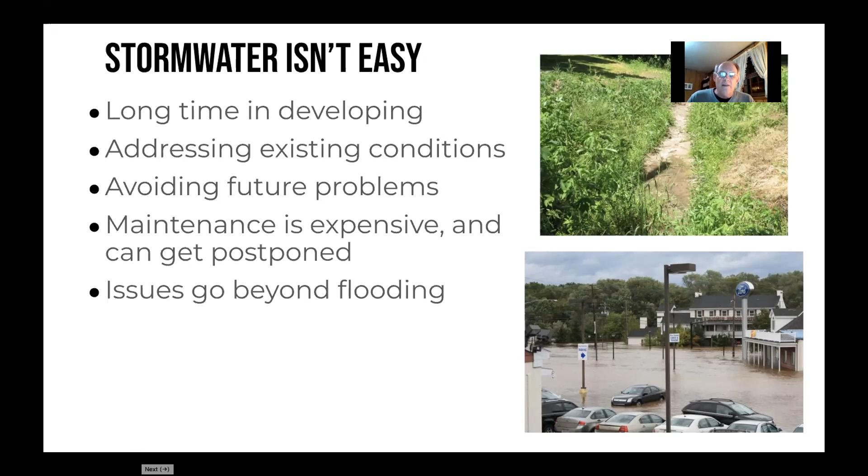And the issues go beyond flooding. The bottom picture there that you see, it's an unfortunate situation. Cars are in the floodwaters, buildings are in the floodwaters, but it goes beyond flooding and gets to the very hydrologic cycle, that water cycle that we all learned about in high school. The top picture is a stream. It's a small headwater stream, and there should be water in it, but there isn't, because we're disrupting the water cycle with all of our impervious surface and the disruption to the land. And so we're creating a problem that's even bigger than just stormwater. Next slide, please.

So what is the problem? And let's get down to a basic question. What is stormwater? So we're all on the same page. We're talking about rainwater that runs off the land during and just after a storm. And can it be a nuisance? Yes. When flooding occurs, when our basement floods or the backyard is wet and mushy, yes, it can be a nuisance.

Can it be a threat? Yes. When roads flood and emergency vehicles can't get through, or people can't get home from their jobs or get to where they're going, it can be a threat. And sometimes people drive through flooded areas and disasters happen. So we can have some real problems relating to stormwater. But it's also important to realize it's a resource. This is the water that recharges groundwater, that keeps our forests alive, that ultimately becomes our drinking water.

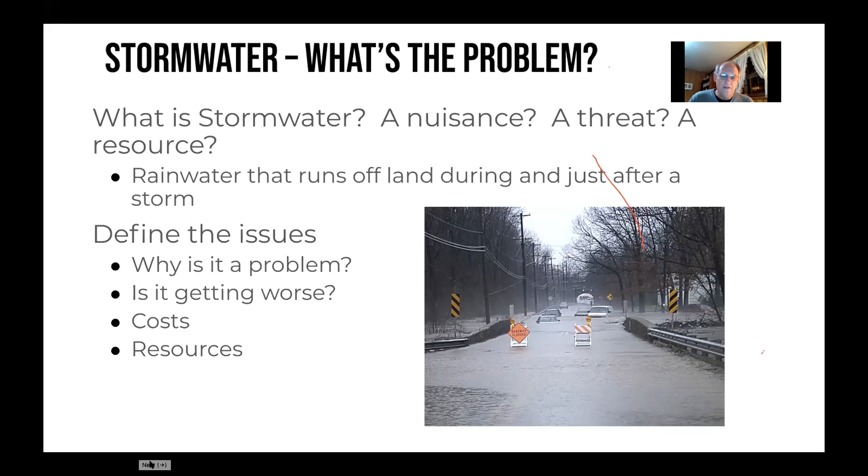So it's a resource. So I want to talk a little bit about why stormwater can be a problem, and is the problem getting worse, and the costs involved. And on my last slide, I just have a few little resources for you to consider once we're done with the presentations. So next slide, please.

Right, these 4 pictures show a transition from the forest. I'm not sure where that red line came from, but this transition from the forest to an urbanized environment. And keep your eye on the horizontal arrow. That's signifying runoff. When rain falls on the land, it can go in 4 different directions. It can evaporate back into the atmosphere or be transpired through leaves of plants back into the atmosphere. It can soak into the shallow soil and be held in the spaces between the soil, or it can soak deeply into the ground where it recharges groundwater, or it can become runoff.

And in the forested situation you see in the upper left, about 10% of what falls on the land can become runoff. As we move from that forested situation to a rural development, which is really low density, even so, runoff can double. We can have 20% of the rainfall running off the land from the hard surfaces that are represented by rooftops and driveways and roadways and sidewalks and so on.

Moving down to the suburban style development that we see so much of in Montgomery County, now runoff is about 30% of the rainfall. And this, again, is coming from all of the hard surfaces, even the lawns that developers put in. They're compacted, they're smooth. So everybody wants a nice looking lawn in their front yard, but those lawns don't infiltrate a lot of stormwater, and it all runs off and becomes about 30% of the rainfall as runoff.

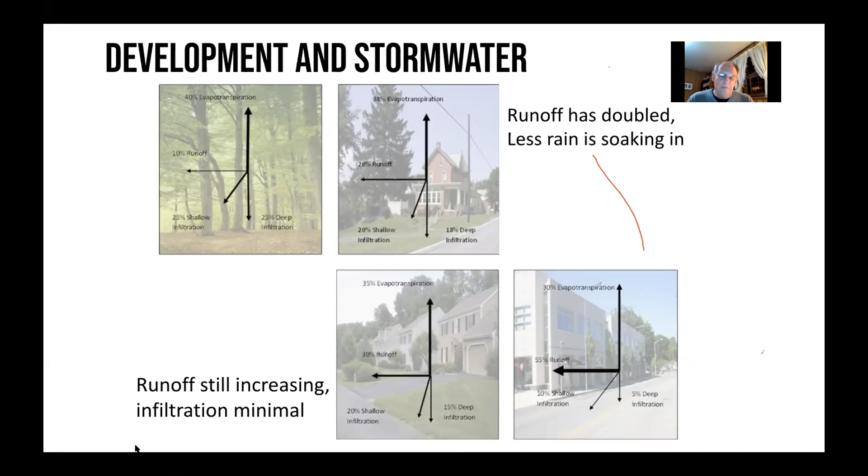Next slide, please. I have an illustration. If you're not good with arrows, this should help. Keep your eye on the little red dot. This is a portion of, I think it's Upper Dublin Township outside of Ambler Borough. This picture was taken around 1969, 1970s.

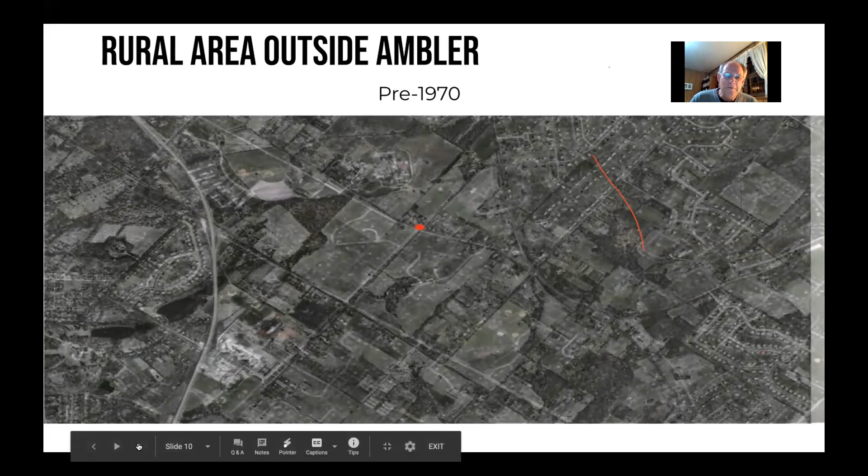Next slide, please. And watch, it'll turn to, I hope, our developed landscape that we see, and all of those roadways that appeared, all of those parking lots and rooftops and so on that appeared. They all generate stormwater. They all prevent rainwater from soaking into the ground, and they become runoff.

Next slide, please. So the result is periodic flooding. It can be nuisance flooding, like I mentioned, with roads being closed, or it can be catastrophic. We've had some tragic events in Montgomery County where people have been swept off of roadways or trapped in buildings, and they've died from floodwaters. And so flooding is nothing to be taken lightly. It's a very serious situation.

And let me just take a moment and ask you, please, never to drive into a flooded roadway, because disaster can happen. So we have loss of services, loss of property. People's yards get washed away, buildings get damaged, and the threat of loss of life. Even our emergency response personnel, when somebody gets stranded, you see that lower picture on the right, they're there to help, but they're putting their lives on the line, and it's dangerous.

We also see environmental degradation. All of the material on the surface of the land, the automotive fluids that drip from the bottom of people's cars, sediment, road salt, that all gets washed into streams, and that causes environmental degradation. Or even just what we call the flashiness of a stream, where the stream quickly rises during a storm and then decreases down to that trickle you see in the middle of that creek there.

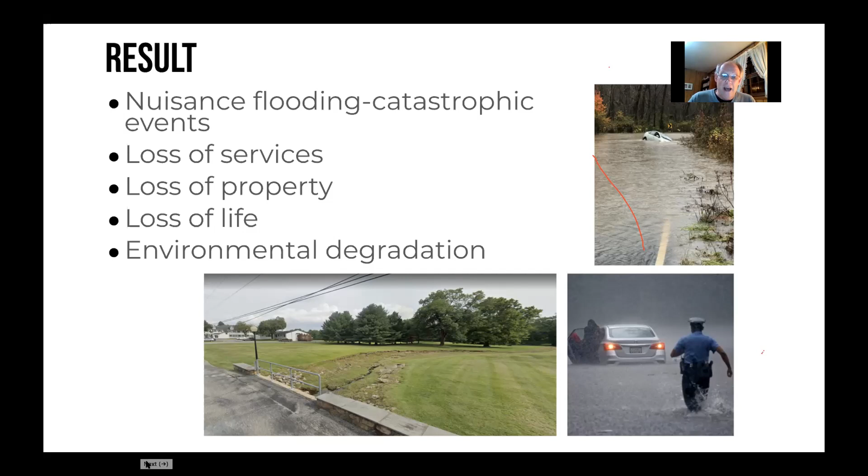That's not a healthy environment for anything. The fish, if there's anything that's living in there, they're stressed. There's no trees to shade the water. There's no vegetation on the banks to hold the banks in place. It's just a degraded environment. Next slide, please.

Okay, so the question is, is it getting worse? I hear people all the time talk to me at work and they say, it just seems like we're getting worse rainfall events. And they're right. This map came out a few years ago. It shows from 1958 to present, the increase in heavy rainfall events.

And that's my lifetime. I was born in 1959. So this is something that I've experienced, everyone's experienced. Look at Pennsylvania, 71% increase in heavy rainfall events during that time period. So it is getting worse, and we are seeing more flooding. It's not just your imagination. Next slide, please.

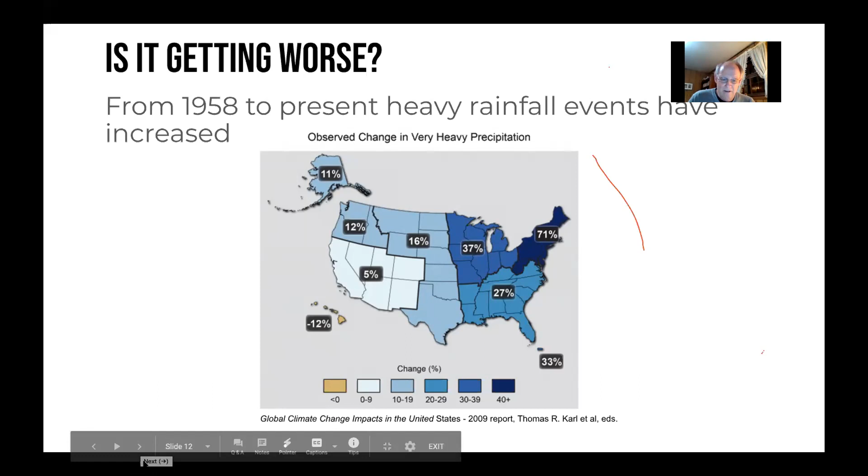And we all see these events. If you've got a smartphone and you're on some notification device, when a storm comes, your phone's going off every 5 minutes telling you about a flash flood watch or a flash flood warning. We see rainfall amounts on forecasts. Then after the storms, the media shows pictures of destruction, roads being washed away, culverts being undermined.

PEMA, the Pennsylvania Emergency Management Agency, did a study a couple years ago and found that $125 million in damage was caused to public infrastructure by severe storms. That's not private property, that's public infrastructure. And nearly half of it was not covered by federal disaster aid. So who covered that cost?

Well, the local governments, local agencies, but ultimately you and I covered a fair amount of that with our tax money. And that's money that literally is down the drain. I mean, we could avoid that cost with some good solid planning. Next slide, please.

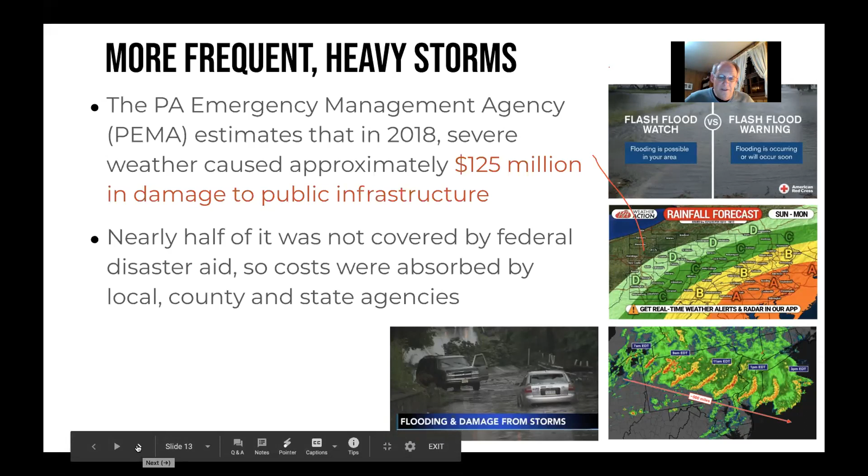More on the cost of stormwater. It's not just the facilities. They have to be inspected. They have to be maintained. Storm drains need maintenance. If they clog up, that'll result in flooding. New facilities need to be installed to correct problems as they come up.

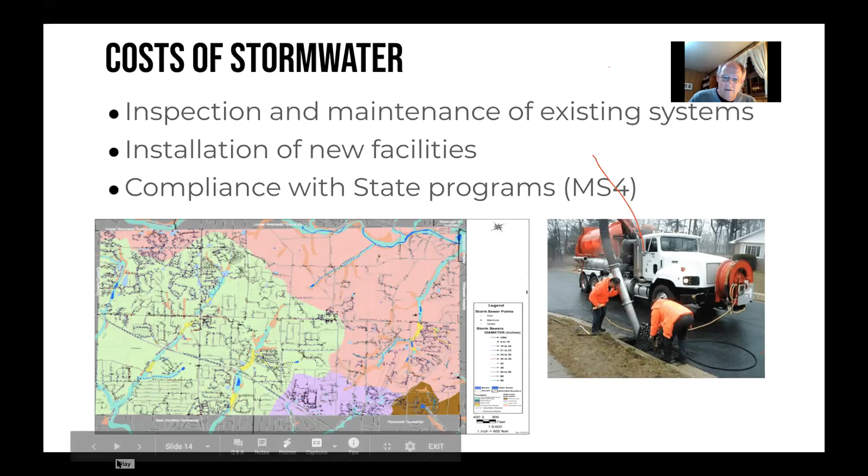And when I talk about costs, people always say, well, what's a rule of thumb? And I found there's no rule of thumb. You can't say, well, it costs so many dollars per gallon of stormwater treated or whatever, because everything is different. The situation is different. The physical characteristics are different, and it's very difficult. But I have some cost figures here to give you a general idea of what we're looking at.

The EPA has looked at their program, the MS4 program, and they found that developing the program across the country cost municipalities over $600 million nationally. That's an average of $140,000 per municipality. Now, of course, a small borough, like Green Lane Borough or Red Hill, they didn't spend $140,000, but places like Abington Township, Lower Merion Township, they probably spent a lot more.

And the annual cost of maintaining their program is approaching $1 billion nationally, and that works out to about $230,000 per municipality. So it's an expensive program just to manage stormwater and meet certain requirements that the state is imposing.

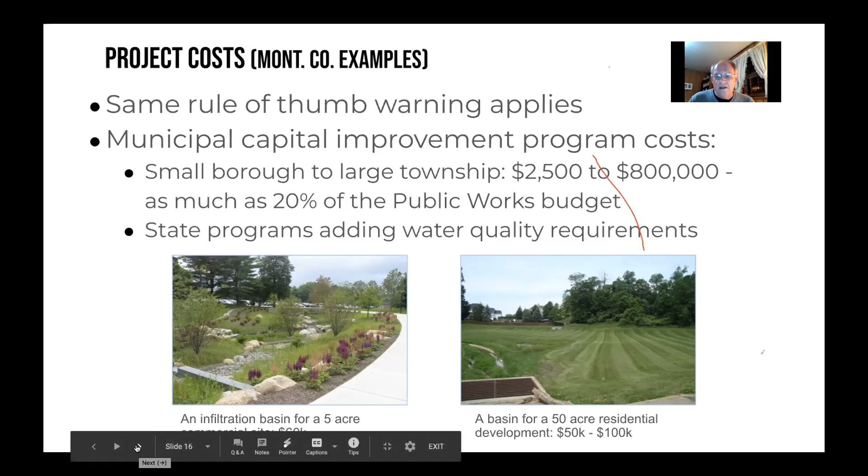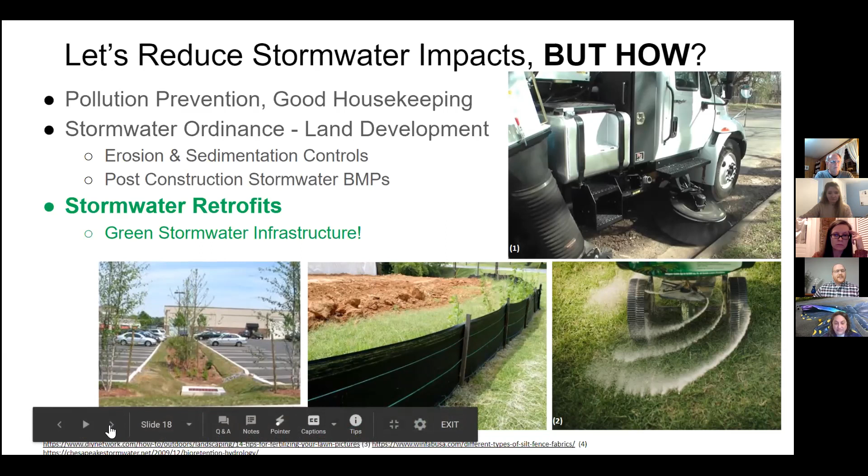There's also other programs that they have to manage. And to be honest, land development is always seen as an increase of stormwater runoff and an increase of problems. But you have to acknowledge the fact that there are programs to reduce the runoff of sediment and washing of soils into our waterways. So your municipality is inspecting construction sites and requiring designs that have erosion and sedimentation control. So they are doing their part to try to reduce erosion and silt into our waterways.

And then there's also post-construction stormwater management. Drew mentioned that older developments really don't have any management of stormwater. And so if a site is redeveloped and there's not a huge increase in impervious cover, the runoff from the site is actually in somewhat of an improved condition. It's slower, it may be treated more through stormwater management where it wasn't before. But a lot of times these are out of our control. We might not want a lot of development. We might not have control over the construction conditions.

So a lot of residents, and there's quite a few residents on the call, retrofitting, you may convince your municipality or you yourself might retrofit solely for the purpose of stormwater management. This is not based on land development. This is to improve the water quality and reduce flooding in your neighborhood. So stormwater retrofits, commonly the term that is promoted for stormwater retrofits is green infrastructure. What I'd like to do is just present a few types of green infrastructure that either at the municipal level or the residential level are feasible to do. And to be honest, I have a great time building them and designing them for work.

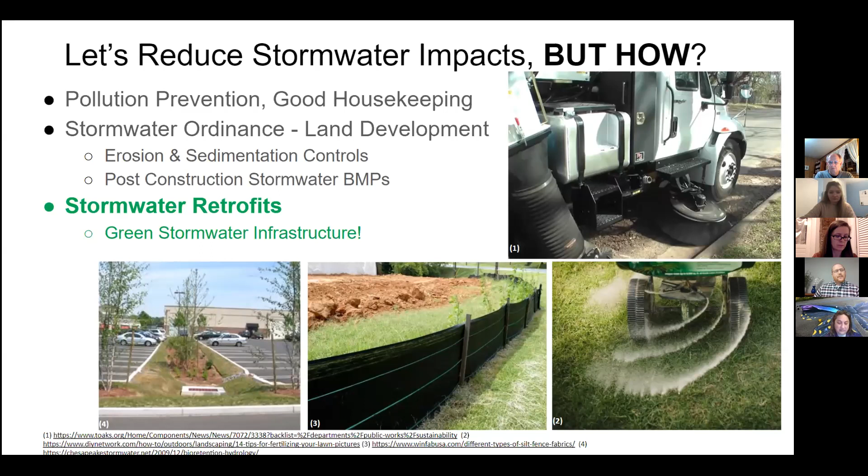So in these images, just on the slide, like I mentioned, street sweeping and reducing some of your fertilizer use. These are controls where we reduce the pollution in the runoff. E&S control, erosion and sedimentation control, and/or land development does impact stormwater, but not always in a negative way. Next slide.

So I mentioned green infrastructure. So what is green infrastructure? It's for some a new term. For others, they've heard it before. If you've heard of stormwater best management practices or low impact development, these are really common terms and they overlap quite a bit. Green infrastructure is intended to be a stormwater management practice or control practice that uses or mimics natural processes. So if it's constructed of natural materials and follows the natural cycles, or at least if it mimics those cycles, it's considered green infrastructure.

And green infrastructure tends to get used as a term when there's more than just stormwater management as a goal. There is water quality protection. In urban environments, there's tree canopy and shading as a benefit. You might improve a streetscape in addition to managing stormwater runoff, create some habitat for local wildlife. And a lot of these are used for community amenities, either in parks or in educational settings. So green infrastructure is used typically as a description of something that has more benefits in addition to stormwater management. Next slide.

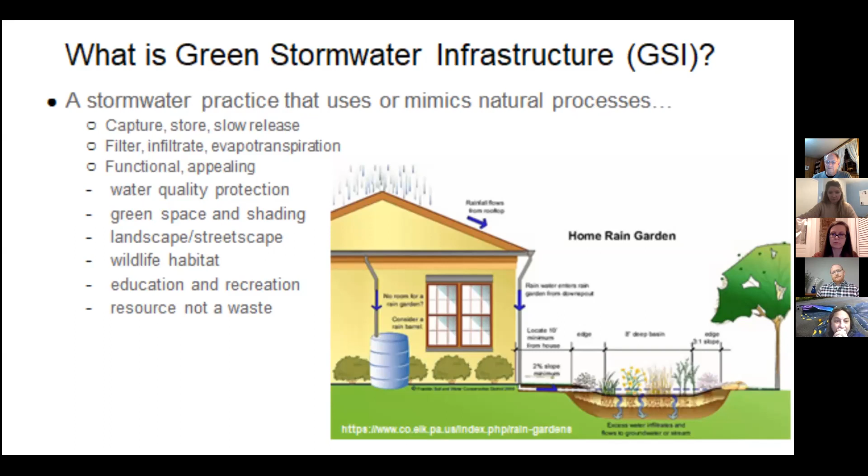So the question is, how do you design these, or what's the approach for green infrastructure and stormwater management overall? What we're trying to do for water quality is to manage the storms that happen more frequently and to manage the portion of a large storm that washes off most of the pollution.

some major flooding and extreme events. But to really improve water quality and do our part, we're typically down to around 1 inch of rainfall. A 1-inch storm or slightly larger is 90% of the rainfalls you'll see in your year. And that's really where most of the pollution is coming from. And even slightly larger storms, that's mostly where erosion and your streams are being impacted. So we're not really talking 10-inch rainfalls or those real extreme events. Usually we want to target for green infrastructure these smaller events.

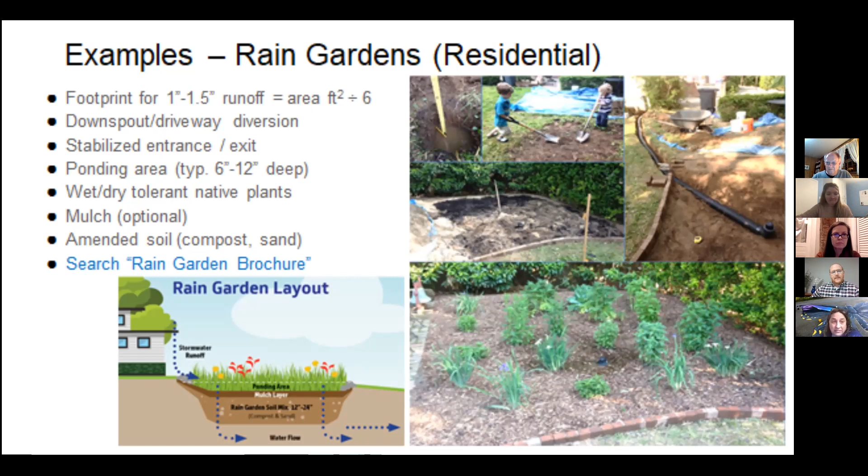Rain barrels are another really common one, and I'll try to speed up because I want to give our other speakers some time. But rain barrels are great. The only thing you have to keep in mind is the size of the rain barrel. If you have a roof that's maybe 10 feet by 9 feet, an inch of runoff from that roof would fill a 55-gallon drum. A lot of people think that they can hook up a rain barrel to a really large roof and accomplish the goal, but it's likely just to fill up with a very small rainfall. And so you may want a larger one. You may have a series of rain barrels, or one for each downspout.

The common concerns are mosquitoes, things like that. If you have a screen top, and a lot of these have screen tops, mosquitoes won't breed and cause an issue. You do have to have a way of draining it, and you have to consider what happens in the winter when you're not using the water from a rain barrel. You don't want it to freeze and break the rain barrel.

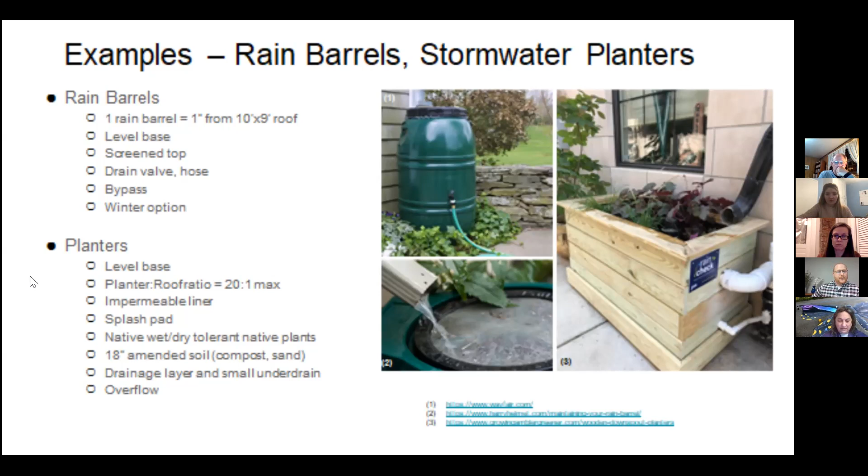Villanova's picture to the right. I imagine we have some Villanova representation on this call, so I give them credit for that. They've tested out and developed quite a lot of stormwater solutions. If you have a surface area that you just can't give up in terms of using it, your driveway or your patio, there's a lot of solutions that are open graded pavements, either an asphalt or pavers that have spaces between them. And the water soaks up just like it would in a soil.

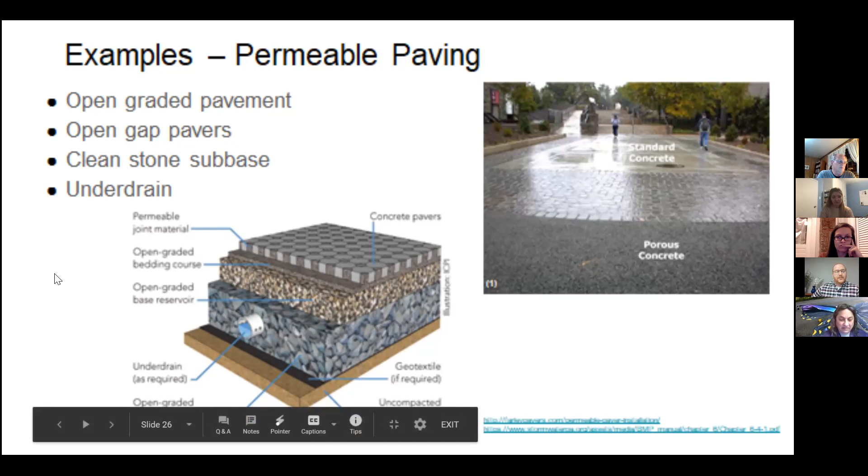And if you can infiltrate, that's great. It goes down into the soil and filters just as well. If not, you have an underdrain, and it would be slower than it would run off of your normal paving. So it's a great solution if you need to use the space. Next slide.

So tips overall, hopefully this will be recorded and maybe we'll have some of this available to you later. I just want to make sure that you have fun when you're doing this. This isn't supposed to be complicated, right? Even at a township level, you should have fun. You should create a space that works for you, accomplishes the goal. For design considerations, just make sure that you have these stable entrance and exit, because bigger storms will happen and you don't want to create a problem by trying to build a solution.

Select the plants, the type, and the blooms and the seasonal variety that's appropriate for rain gardens. You want to plan for winter, make sure you have underdrains if there are any draining issues, and provide a space and a means for maintenance. These aren't maintenance free, just like any garden. You have to get to it and you have to be able to maintain it without damaging it. So there's some planning involved.

Overall, I would say if you're looking for more information, think of the kind of stormwater practice and Google that or search that and brochure. And there's a lot of community entities that are trying to educate you on how to do this at your home. So it's easy to find. And if you need any more help, I think you'll have my contact info. I'd be happy to help. So I think now we're moving on to speak about funding options.

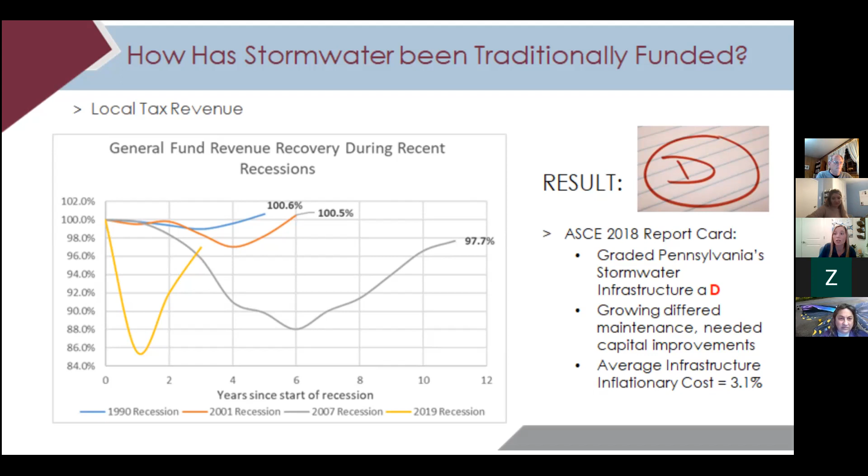Since 2006, the average cost of inflation for infrastructure has risen 58%. This means a stormwater project that cost $1 million in 2006 now costs about $1.6 million. Yet the average municipality collects less tax revenue to maintain infrastructure than they did before. The result is a lot of deferred maintenance. Drew mentioned that earlier in the presentation, and that includes stormwater infrastructure. In fact, the American Society of Civil Engineers graded Pennsylvania's stormwater infrastructure a D in 2018. Why? Because of the growing amount of deferred maintenance and the growing need for capital improvement projects. So where do we go from here? Next slide.

Well, municipalities throughout the United States have turned to stormwater utilities. They're a mechanism for meeting the funding gap, and they're a growing trend, especially now in Pennsylvania. Western Kentucky University periodically surveys stormwater utilities, and they're estimating that there's over 1,800 in the United States. They've continued to grow over the past 5 decades due to increased regulation and significant precipitation events, especially those causing flooding. Pennsylvania was a little late getting to the party.

We didn't have enabling legislation until 2013, which gave municipalities the ability to transfer stormwater program management activities to a municipal authority and for the authority to charge a stormwater fee. In recent years, I've worked to implement stormwater utilities benefiting over 50 municipalities in Pennsylvania, and year after year, the number of stormwater utilities in Pennsylvania seems to double, even last year during COVID.

Next slide, please. So how does a stormwater utility work? Well, the long-term needs of a municipality are evaluated. That includes stormwater problems like flooding, the need to replace aging infrastructure, regulatory requirements, polluted streams, and the desire for green infrastructure. The priorities of the community are considered. These are things like public safety, improving water quality, protecting property values, and the like.

And then that's used to consider the long-term cost of stormwater management for the community and how to meet those goals in a low-cost yet effective way. Those costs have been allocated to all developed properties in the municipality in the form of a stormwater fee. In Pennsylvania, the average residential property owner typically pays between $5 to $10 a month if they're paying a stormwater fee. If you don't have a stormwater fee in your municipality, then you're paying through taxes.

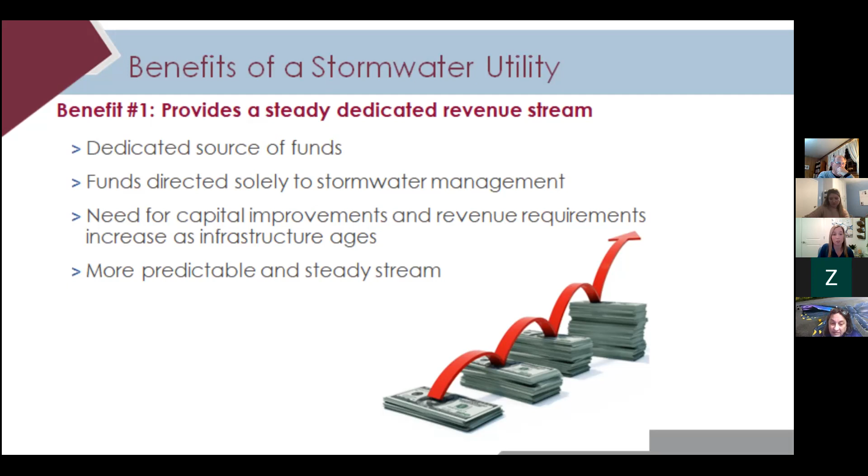Another financial reason is that stormwater fees are more equitable than a property tax. That's because rates are based upon a property's impervious area. Impervious areas are surfaces where stormwater can't infiltrate. Instead, it runs off. So it includes things like building footprints, asphalt, concrete, and the like. And studies show impervious area is the best correlation to the quantity of stormwater runoff or the quality of runoff generated on a property. Much better correlation than assessed property value.

You know, it's possible to have a skyscraper and a parking lot with vastly different assessed property values but the same impervious area footprint. So they generate the same amount of stormwater runoff, but paying through taxes would be inequitable. One would pay much more than the other.

Another way in which stormwater fees are more equitable than property tax is that all property owners with developed land pay for stormwater, even tax-exempt properties. If you think about tax-exempt properties in a community, it would be schools, universities, hospitals, churches. If we think about those types of properties, we think about large buildings and large parking lots. So typically they're generating a lot of stormwater, but they're not paying for it since they're tax exempt. So with a stormwater fee, for-profit businesses and residents don't have to shoulder the cost burden of stormwater alone.

These two reasons result in a significant cost savings to residential users. As I stated on the previous slide, we did a survey of the 50 municipalities where we've implemented stormwater fees, and the average residential property owner saves 40 to 70% by paying a fee instead of paying for stormwater through taxes. Next slide, please.

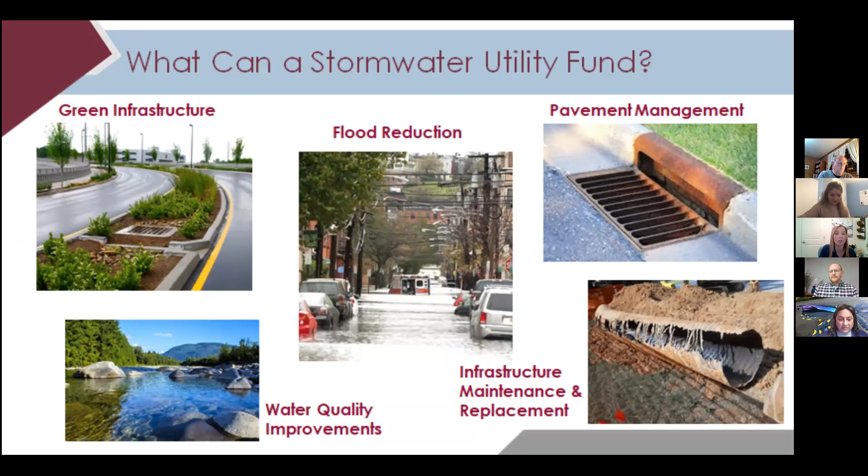So how can a stormwater utility really benefit the community? What can a stormwater fee be used to fund? Well, for starters, each of the items on the slide: green infrastructure projects, flood reduction, pavement management, improvements which result in better quality of water in lakes and rivers, maintenance of stormwater infrastructure. Each of these things have the added benefit of improving the community, bolstering economic development, increasing property values, and ensuring that where you live, work, and play continues to thrive for years to come. Next slide, please.

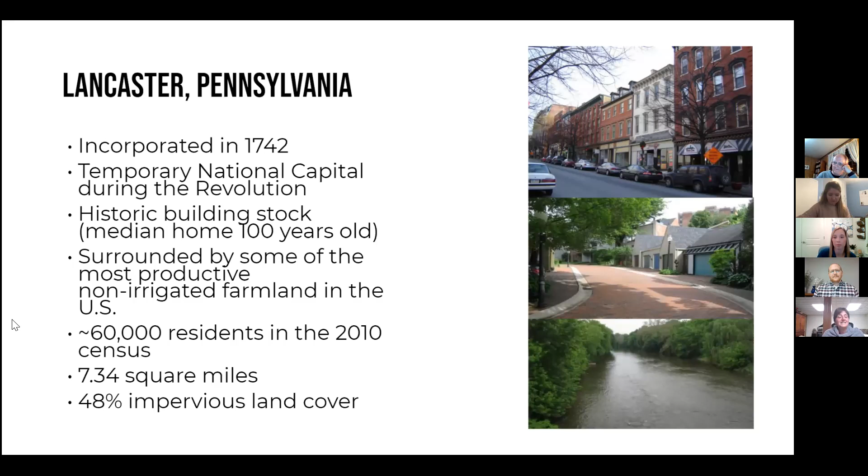So the first thing that we took a look at when we started thinking about how we could collaboratively address stormwater management in an integrated fashion in the city was our goals. So if you're a municipal official or a planner or a county official or even a resident, you know that municipalities really like to plan. And planning is good. When you plan for success, you obviously want to follow through with that.

So we had a number of plans on hand already, and we took a look at those and really came up with the idea of developing a comprehensive green infrastructure plan with the goals of being sustainable, and that would include financial sustainability, which led to us implementing a utility and a stormwater fee, incorporation of green stormwater infrastructure into our plans, ordinances, and codes, as well as integration with all of our construction and reconstruction projects, including some of those capital improvement projects that others have mentioned previously.

And one thing that I would like to mention that hasn't really been mentioned yet is our urban forestry plan. Urban forests can provide additional stormwater management as well as additional co-benefits to the municipalities where they are implemented. And they can also be credited towards stormwater management obligations as well. Next slide.

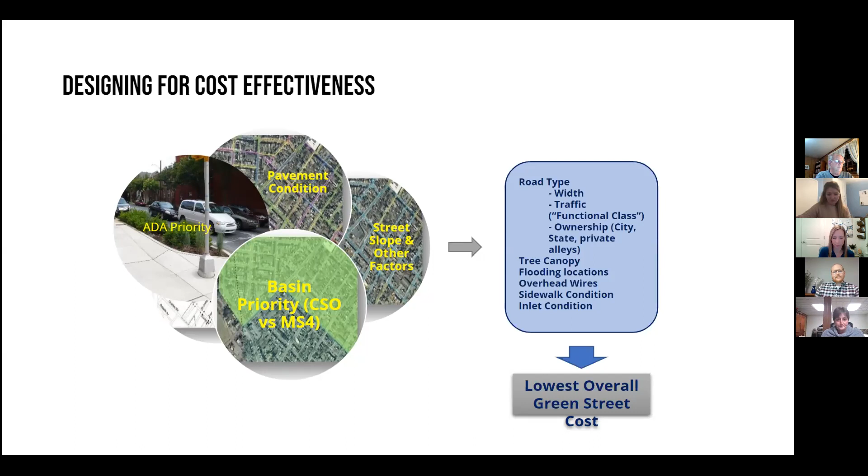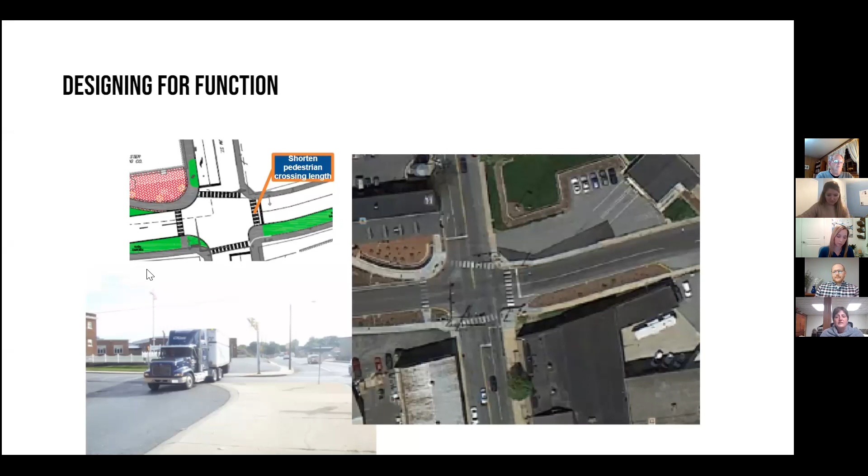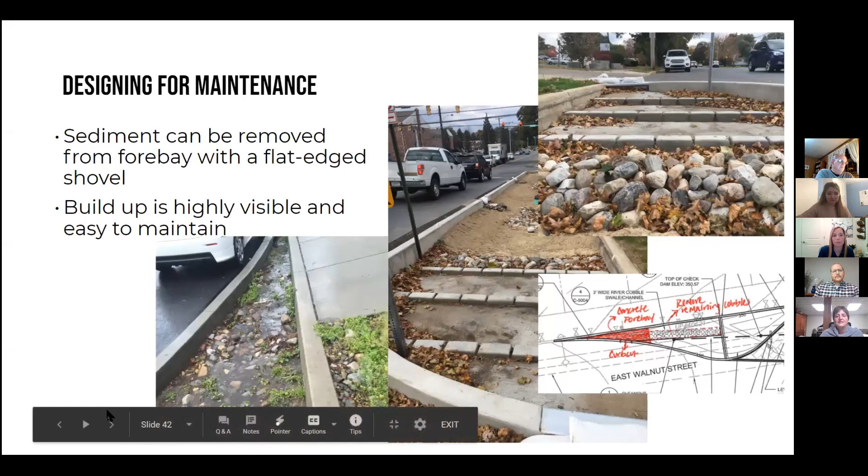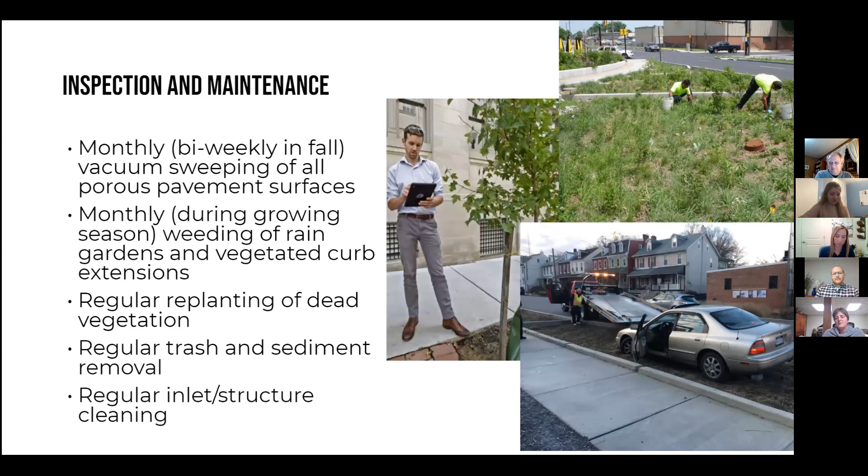inlet and structure cleaning, and then occasionally you'll get some of those non-routine maintenance practices like you see in the lower right here, which involve a tow truck bringing a car out of a curb bump out. Not something that happens on a regular basis, but it's something to think about and make sure that you have a policy in place for that. Next slide, please. That would also fall under the good housekeeping procedures that were mentioned earlier. Making sure the staff know how to clean up if there were potentially a fuel spill.

Finally, before I close, one of the things that Lancaster City could not have done any of this without is public engagement and partnerships. So again, at every opportunity, we had to have public support for everything that we were doing. We did a lot of outreach and engagement with the public before we instituted the utility and the stormwater fee. We offered workshops to contractors when we began updating our ordinances and regulations. We incorporated public art so that we had some visual aspects to bring attention to stormwater practices that were being incorporated as part of capital improvement projects.

We engaged the public in an adopt-a-BMP program so that we could save some of our maintenance costs and get extra eyes on the ground, if you will, to make sure that our practices, when they needed to be maintained, were maintained. And we also partnered with local organizations, conservancies and watershed groups to really help promote the program and emphasize the success that we were having.

As I'll close, next slide, please. I can't stress it enough. Teamwork makes the dream work. Residents, elected officials, planners, engineers, volunteer organizations, and watershed associations and other organizations like the TTF partnership are vital to making things work in a municipal structure.